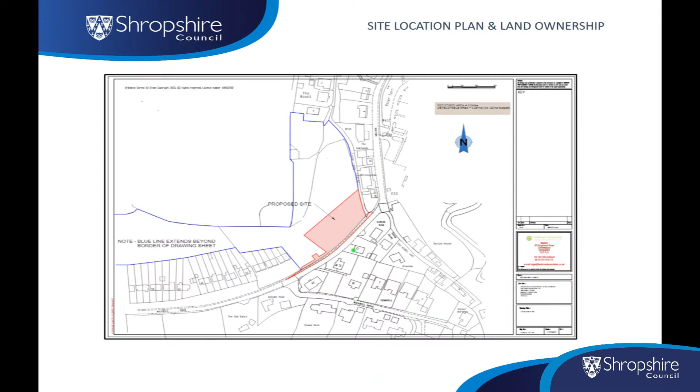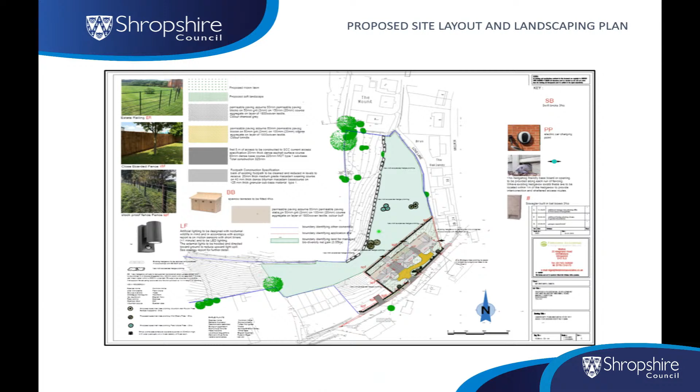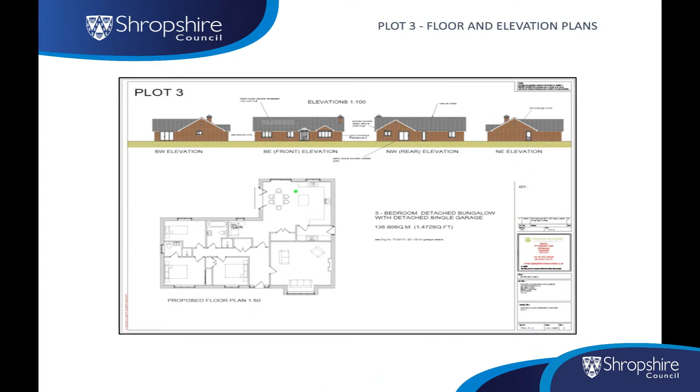These are the proposed floor plans and elevations, all relatively modest 3-bedroom bungalows. They're all arranged slightly differently, but all providing similar floor area. This is the proposed garaging. Again, fairly simple design, ties into the dwellings that they associate with.

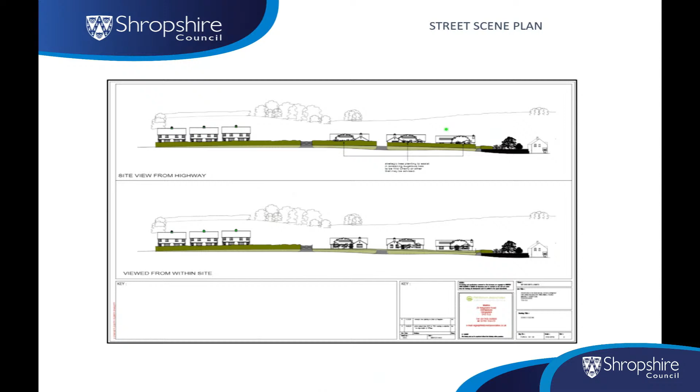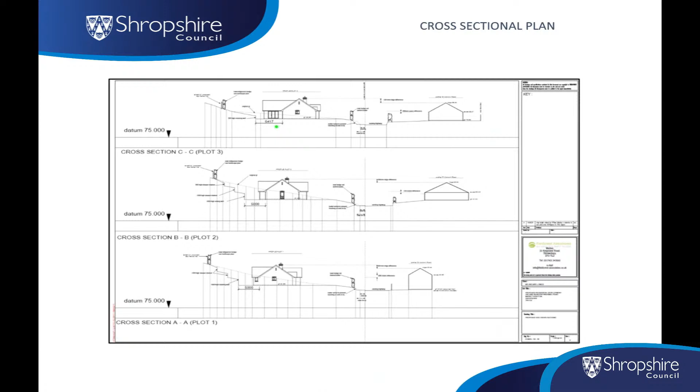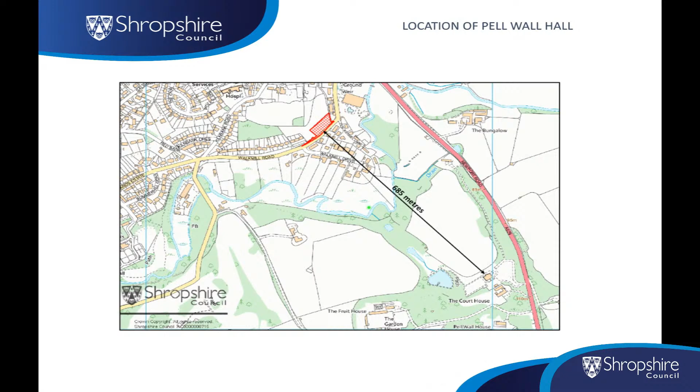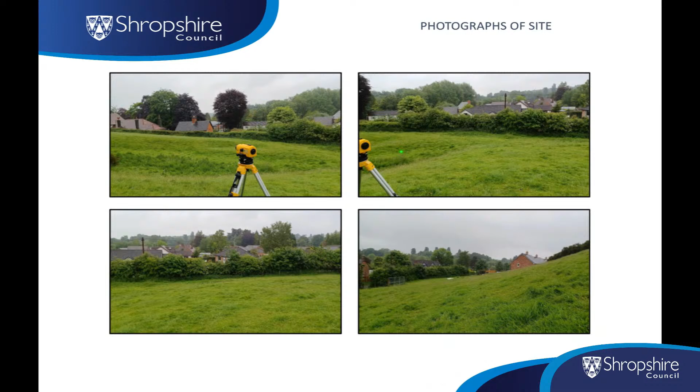Yeah, there we are. That concludes.

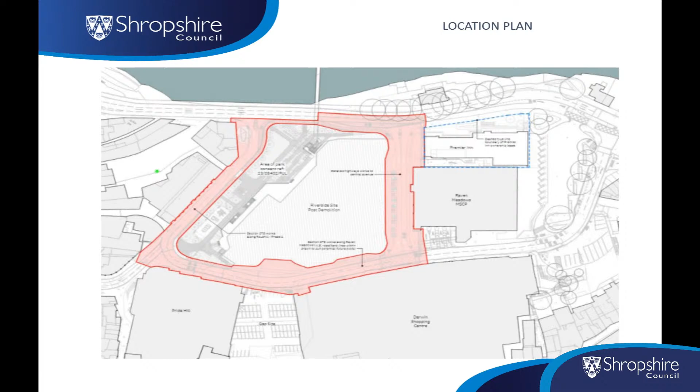This is the red line encircling the site for this second application we're considering today - it's for the highways works. And thirdly, there is an application currently submitted in outline for the redevelopment works, which will control the quantum and use of what the future Riverside area will look like. There's no detail in terms of layout or scale - that's for another committee.

So this application can essentially be broken down into three different stages. Firstly, you've got the Central Avenue - this is to create a new two-lane carriageway dissecting the Riverside shopping centre site and the multi-storey. The intention is that this new two-lane carriageway will take the majority of traffic flow looking to access the Pride Hill servicing area and the multi-storey car parking.

The Central Avenue is essentially two-pronged. There's an interim stage which this application will decide, and ultimately an end stage which the Highways Authority will do under their statutory powers - so we do still need to keep an eye on that in the future. In terms of today, it's just that interim stage, which shows a two-lane carriageway in a southbound direction. Ultimately it will become two-way, and depending on what happens with the bus station just over here, there may be some intermediary bus stops along this Avenue Road also. To the left-hand side is an illustrative image of what the road will look like.

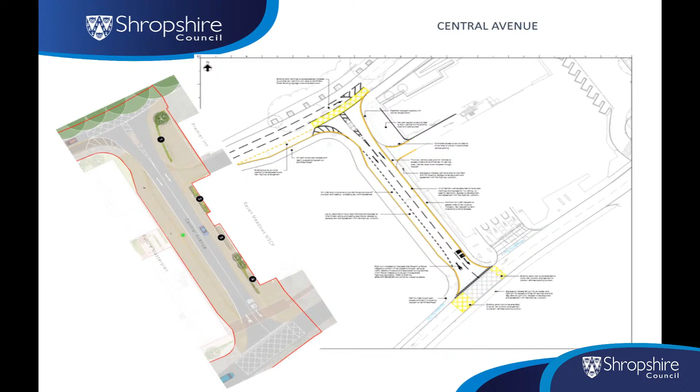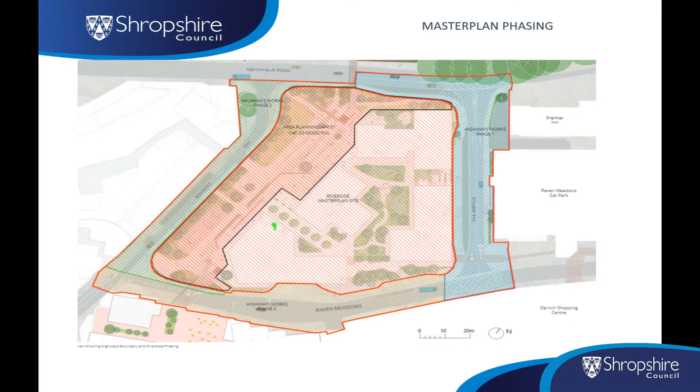All detail will be conditioned, and further information will come through that application, which is still being decided, because the red line boundary on the outline application that we have, not yet at committee, also includes the highway works area. So a couple of photos here showing the rough routing of where it will go - this is off Raven Meadows and currently serves the Premier Inn and the multi-storey car park. It's intended that this will just be extended through onto Smithfield, exiting about here.

Second element is Roushill - this is over to the west of the site. Roushill is currently a two-way carriageway, two lane. But because of the diverted traffic flows down through the avenue, it will relieve a lot of pressure off Roushill, such that we can downgrade it to just a single lane carriageway. So the intention is that only vehicles needing to access Mardol or Claremont will need to go down Roushill.

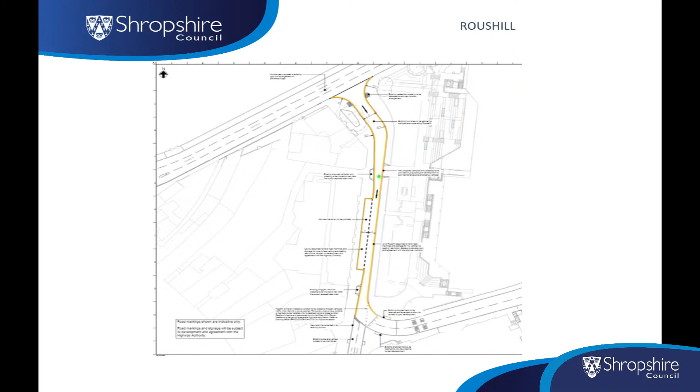A couple of photos here - this is from Smithfield, you can see it's essentially been downgraded to single lane at the minute whilst the demolition works are ongoing anyway. And this is looking from, well, not quite from Mardol, but as if you were exiting Mardol back down towards Smithfield.

Thirdly, Raven Meadows - the proposals here are to stop up Raven Meadows approximately midway between the avenue and Roushill. Where they're stopping it up, there'll be a designated cycle lane, and there's a turning head installed here so that servicing units can still access the Pride Hill service station and Pride Hill servicing area. Then this is the gap site, which is currently a car park. There is an access spur still provided in here, but the gap site is also part of the future Riverside redevelopment, so there may be further works that come forward on that in terms of developing that site.

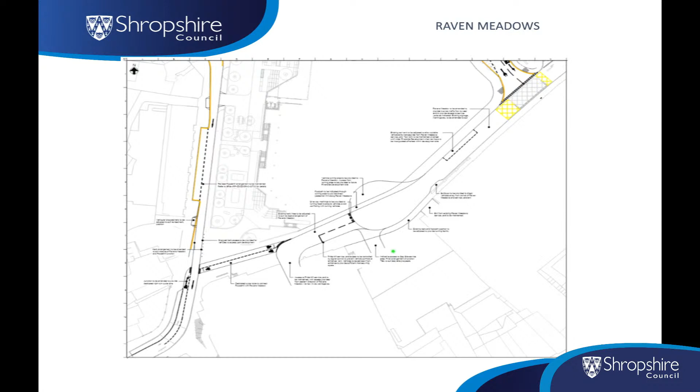A couple of photos to show Raven Meadows, though this is looking from Roushill. You can just see the gap site in there. This part of Raven Meadows will become a designated cycle lane, and then there'll be the turning head installed in there. And this is the section showing it from the proposed avenue junction.

This is the gap site. At the back of the gap site, there is a scheduled ancient monument. It's located in there, part of the old medieval walls. There's also a couple of listed buildings that are part of Pride Hill.

Heritage assets have been considered as part of the application, but because it's currently a highway and the proposed development is a highway, there's negligible impact. Whilst there may be some differences in how the sites are appreciated, i.e. they were travelled by car previously and now it might be more pedestrianised, there was no harm considered to the heritage assets nor the conservation area to which this site falls within.

This is an illustrative master plan taken from the ongoing outline consent. It's not a plan that's part of this application, but I thought it'd be useful to show you the aspirations for what these highway works will do in terms of the wider redevelopment. It's quite hard to see, but you can see a fairly narrow Roushill, two-lane avenue, and enhanced public realm here, which is helped by separating traffic from pedestrians.

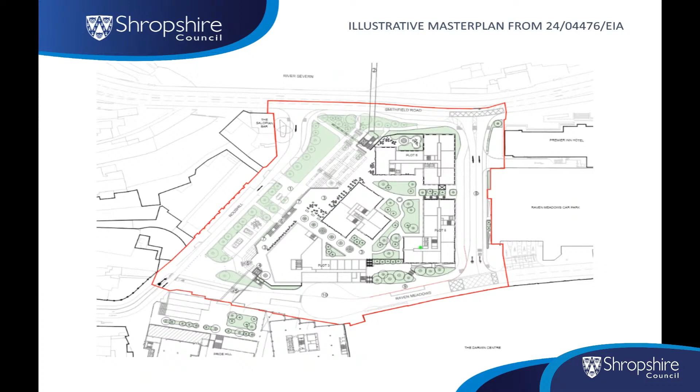Well, thank you to the case officer for highlighting matters relating to cycle provision, because it has been a matter of concern for the town council. And while I take on board his points about the fact that there are other matters afoot that will obviously feed into this in due course, nonetheless...

I would still urge that the developer looks closely to see if some sort of additional cycle facilities can be put in. Anything that encourages people to get on bikes is to be welcomed, and will also mean that when whatever scheme comes out to Shrewsbury in the fullness of time, there will more likely be more people cycling, and therefore making use of it. But otherwise, this is just one of many applications that are going to go in for this, and with the proviso that nearby residents, of which there are some, are not unduly affected, I welcome this. Thank you.

Thank you. Just as a point of clarification, I did mention it in the presentation, but whilst the highways application is being considered as part of this application, if you look on the screen, this is the EIA application we're currently dealing with, and you'll see that the red line boundary to which the application relates also includes the highway land. This reaffirms my point that this application is not the last of it. There will be more works coming forward as the scheme gains momentum and as more detail comes out. We're just laying the foundations to enable us to move forward with the wider proposals.

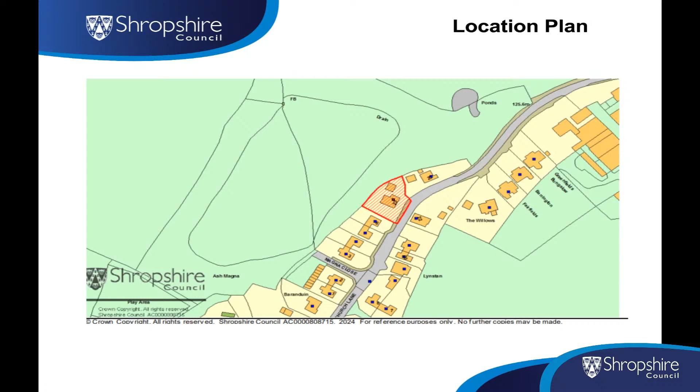This is an application for a two-storey side extension to a detached property in Ash Magna. It's come before committee because it's an officer application, one of the planning officers in Shropshire. You can see it's detached, sitting in a large plot with a nice large side garden. Those are the existing elevations of the building. It's already had a rear extension, and the proposal is for a two-storey subservient side extension.

There are some photographs of the site, showing the side garden it sits in, and the relationship with the adjacent bungalow. There is quite a substantial, generous garden, and I've considered the gaps between the existing development. It's recommended for approval because it's of a scale and size which is subservient to the dwelling, matches the local vernacular of the area, and is positioned to protect and respect the neighbouring properties and amenities.

Is that it? That's it. Thank you. Okay Vince, I'm just going to move that we go with this. Officers are obviously happy with it, it's only here because it's a council officer application. I suspect it would have gone through officer channels and been allowed anyway, so I'm quite happy to move this. Joyce seconded it. Any debate? Anybody want to say anything? No. Let's have a show of hands. All those in favour, please show. There we go, that's them through.

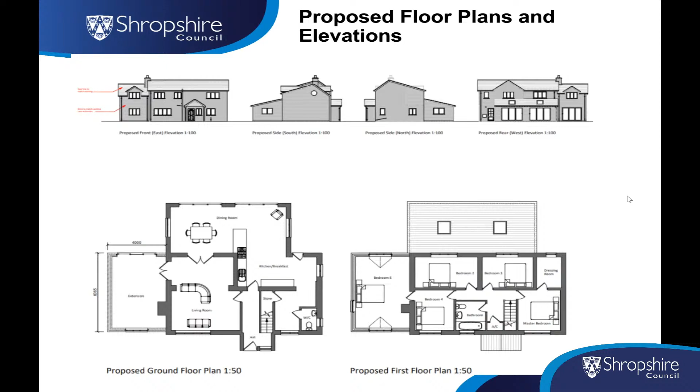Quickly, right, item 10, date for the next meeting is the 18th of March. I presume that will be at...